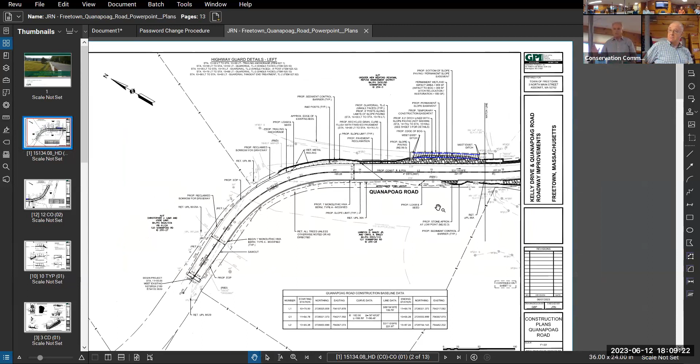So on pretty much the easterly side, that'll all be country drainage, still flowing off the road. On the bog side, what we'll be doing is putting in what's called slope paving - don't let that confuse you, because it's not paving. It's a MassDOT thing where it's just stones, about 2 or 3 cubic feet in diameter, larger stones. For some odd reason they call it slope paving, but we'll be doing that on the side towards the cranberry bog.

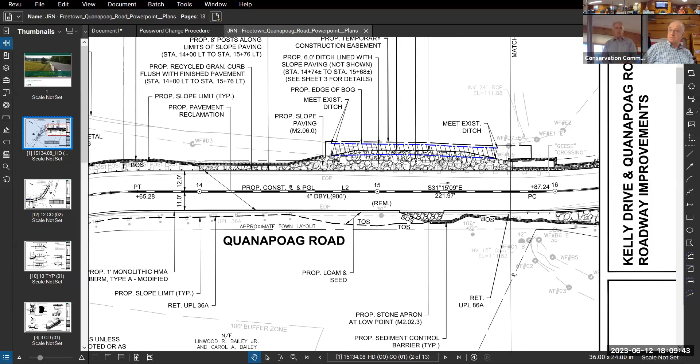And in blue, you can see where we'll be relocating the ditch. We're pushing it out a little bit into the bog side. The very last slide we'll show you is pretty much the extent of the work on the bog itself.

That bog is owned by the refuse district. My understanding is that they are appreciative of this effort by the town. I know Chuck's met with them - actually, we met with the bog operator last week, and he's basically happy, because the ditch itself, and we'll show you the picture, is pretty much filled in from all the sediments in the road.

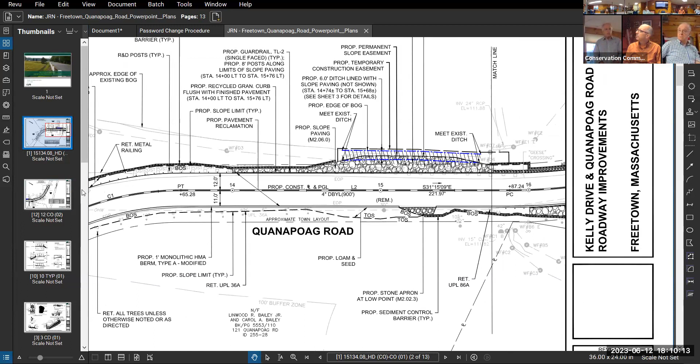That's just going a little bit further around the corner and showing you the extent there. And again, everything will remain country drainage on that side of the road.

Just want to go through - those are the cross sections at the bottom left corner. That would be on the north side, right before you as you're getting into the curve. It's just pavement reclamation. It's still banked on the inside as that water flows down there, it'll continue that flow.

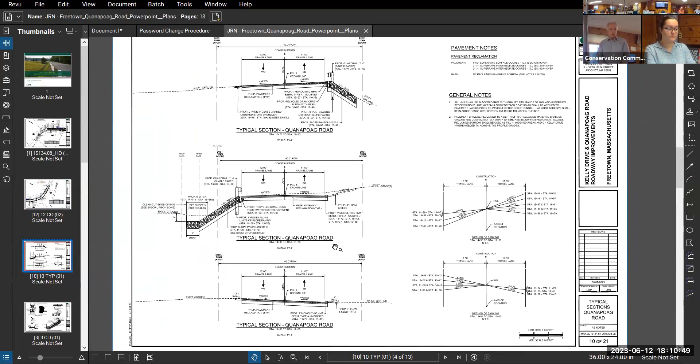As we get to the location where we need to do quite a bit of the slope stability, you can see the slope paving on that side with the new ditch in there. So the bottom of the ditch will be 3 feet wide, and actually it'll fill up - when they fill it up, it'll be about 6 feet wide and then spills out over in the cranberry bog.

And again, there's a detail on the bottom right of what we'll be doing. So on the street side, it'll flow off the side of the road. We'll have a guardrail now - right now there's just concrete posts, and those are just hazardous, and actually they're leaning towards the bog. Everything's starting to fall in.

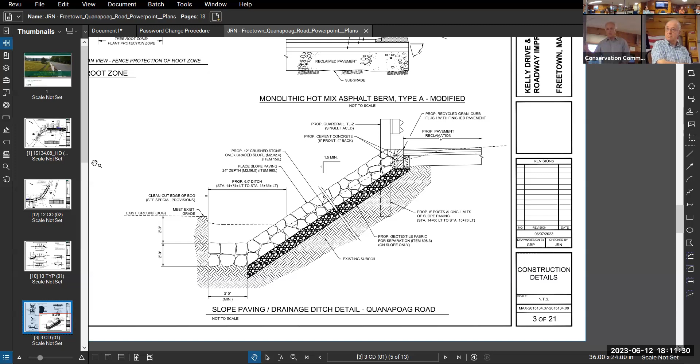So on that side, the flow will go off the road into the stones, and any sand and sediment will get trapped within the stones and won't make it to the bottom of the ditch. We carry that stone all the way into the bottom of the ditch. We need about 2 feet of stone anyways to act like a foot for the slope, so we just figured we'll do the whole 3 feet.

And like I said, we met with the bog operator last week and discussed what we were doing, and he was thanking us because he said he'd have to rent a helicopter for $1,000 an hour to clean out that ditch, which is astronomical. So he was on board with that.

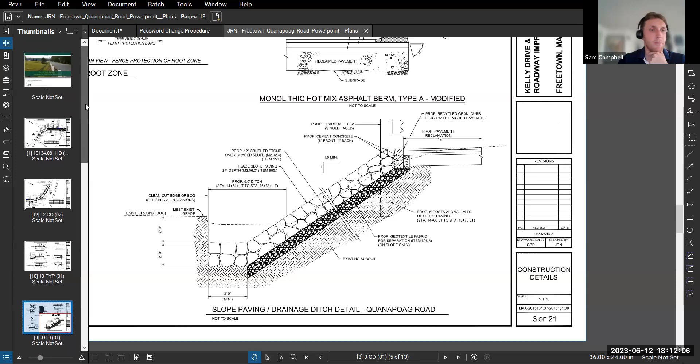Sam, if you want to go through the environmental impact briefly. Actually, Jim, I might just show the other photos first too - I think those might be helpful.

So that's the ditch channel. You can see there it's become pretty shallow over the years, just through that sedimentation accumulating in there, and you're seeing the beginnings of some sort of vegetation establishing in it.

I think, Jim, you said that when you talked to the operator, typically this should be dry, but because of the sedimentation, it's damming up stormwater for longer than usual. Yeah, it's not draining. He said it's dry most of the spring and summer months until they flood the bogs.

That ditch is dry. So just to reiterate, adjacent to this guard post we've got significant erosion down the slope and adjacent to the edge of roadway here and here. And here's another view of the channel, as you can see it's been filled in pretty significantly. You can see some of the issues on the slope as well.

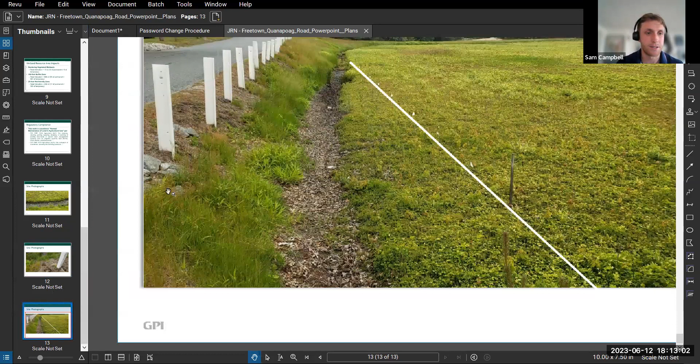This line of white flags was laid out to indicate where the back of the reconstituted ditch is going to end up. That'll be where they'll actually cut the bog, and then the new ditch will be to the left of that line. That makes sense.

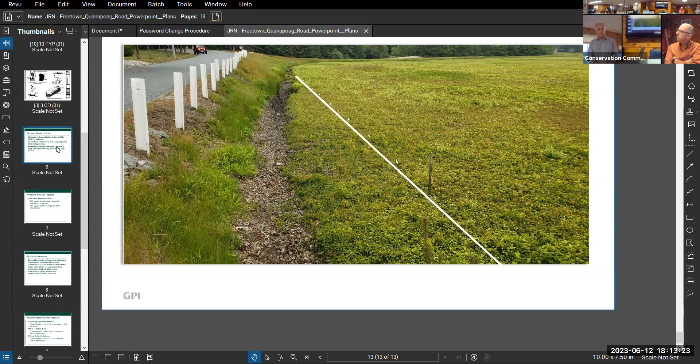Great. As I'm sure you saw in the RDA that we submitted, we had the wetlands out here delineated by ECR consultants in December 2022. They picked up an intermittent stream on the west side of Quanapoag Road, but we're not going to be impacting that at all, that's outside of our limit of work. And then there are bordering vegetated wetlands associated with the cranberry bog itself. So those are depicted on the plans that you saw earlier.

Our total area of alteration is 859 square feet of BVW, all associated with the work in the bog. 550 square feet of that is just the result of excavating the ditch and reestablishing that channel. The other 309 square feet is as a result of that slope paving and the installation of the toe of the slope that Jim was talking about.

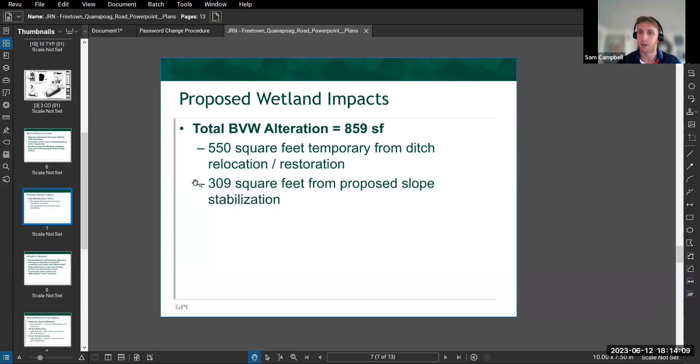As far as mitigation measures, this is going to reestablish a defined bank for that ditch and improve the hydraulic connection both within the bog and to the intermittent stream down gradient of this. So you're not going to get that nasty standing water in the bog - it's going to be dry for the majority of the spring and summer like it's supposed to be.

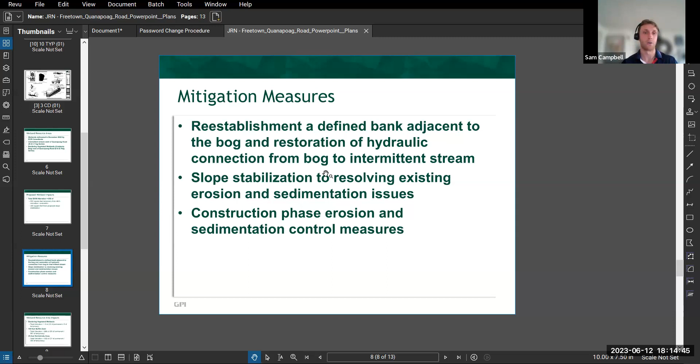We'll resolve the existing slope issues - so you're resolving that erosion, stabilizing the slope and preventing this from happening in the future. And then we're going to install construction phase erosion and sedimentation control measures to ensure that all of our down gradient wetlands are protected during construction.

Regulatory compliance - this work is considered normal maintenance of agricultural land per 310 CMR 10.04, which allows for the cleaning, clearing, grading, repairing, dredging, or restoration of existing man-made or natural water management systems, such as irrigation systems, field ditches, and cross ditches, and 310 CMR 10.04 B13, which is the cultivation of cranberries, including the following practices, which refers back to the previous section about maintaining your drainage ditches.

So this is normal agricultural maintenance that'll improve the conditions on the site, and I think is being seen as a huge plus for the operator of the bog. With that, I think we'll turn it over to the commission for any questions.

Just Chuck's here, so this needs to get done ASAP, right? You weren't here, but they were talking about losing the road, right? Last winter with the frost it was basically heaving that road towards the cranberry bog. Yeah, it's no good. Road shouldn't move.

Again, as we spoke, Chuck's been kind enough to go over what's going to be done, how they're going to go about doing it, which is why I knew a little bit more about this project. So I do appreciate you taking the time to come in, give us the presentation, let the folks out there know what's going on. Does anybody have any questions from the board?

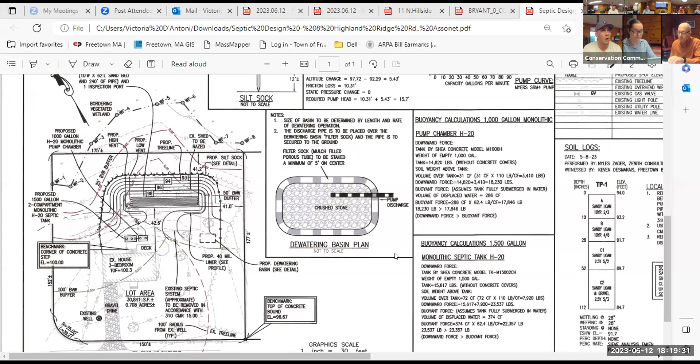As you can see, it's a fairly small lot, only about 30,000 square feet. There's a wetland to the north side of the property, the rear of the property, which you can see flagged as wetland 1 through wetland flag 8. A portion of it does fall off the property in the rear there.

Basically what's forcing us within the 100 foot buffer zone is the fact that the well is in the front of the property, so it forces us in order to meet Title V requirement of 100 feet from that well to put the system in the back of the property. That is currently where the existing system is as well. The soils were luckily fairly decent, but the water table is very high, which you would suspect.

So the proposal is there's gonna have to be some vegetation removed, but the proposal is to put in some silt sock, clear the trees, remove the existing septic system, and put in a new 1,500 gallon, 2-compartment H20 monolithic septic tank, a 1,000 gallon H20 monolithic pump chamber, and a Presby system.

As you can see, the grade from the back of the house down to the wetland is fairly significant, about a 5 or 6 foot elevation change. In order to be able to build this system, we have to build that area up, which you can kind of see by the contouring around the septic system, in order to meet the groundwater separation required by Title V.

Luckily we were able to stay over 50 feet from the wetland with the septic system itself, and we're staying outside the 25-foot buffer with all work. We're going to be adding erosion control, and I also provided a dewatering basin, which will probably be necessary during construction since it's a fairly wet time and a wet site.

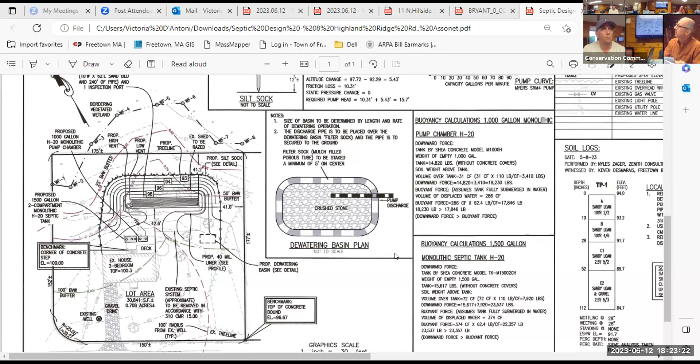This isn't Presby, is it? It is a Presby. That Presby allows for a 40% reduction in footprint, so you're making it smaller too. Yeah, essentially, if it's a 1,000 square foot typical conventional system, this would be a 600 square foot.

That's not the case here, but in general, that's the benefit of the Presby system — it allows for that significant decrease in footprint. And you no longer need the 5-foot overdig either, that's also eliminated. So it allows you to keep a smaller footprint overall.

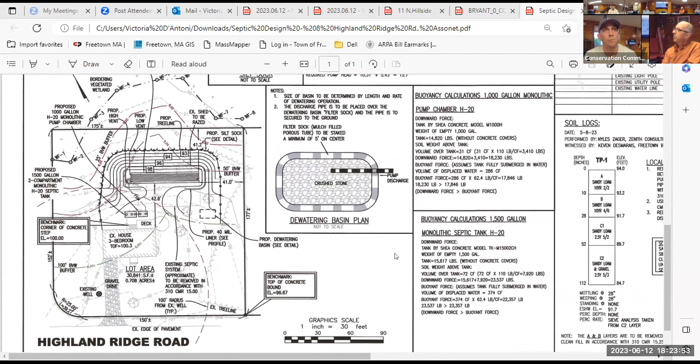If I'm not mistaken, then we're all set. Excellent, I'll entertain a motion that we issue a negative determination number 3.

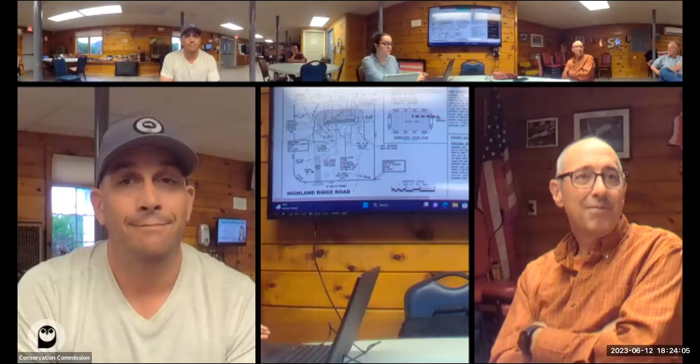I need that motion. I apologize, I know I usually drone on, but you've all heard me say it a thousand times — negative determination number 3. Motion made, thank you. I'll second. Motion made and supported, any further discussion on the motion?

Hearing none, all those in favor signify by saying aye. Roll call vote: Charlie Sullivan, aye. Margaret French, aye. Keven Desmarais, aye. Motion passes unanimously.

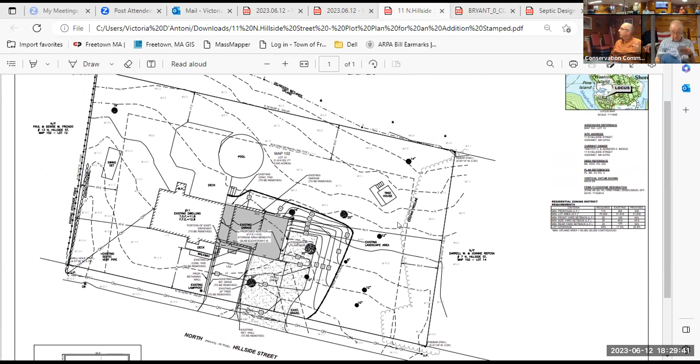So you're gonna have your footings, I'm thinking now about spoils, how much material are we gonna be bringing out, where are we gonna keep it? Is it gonna be able to be taken off site that day? Typically, when we're permitting work within a flood zone, granted this isn't a velocity zone, but still.

And I get it, you don't need to provide compensatory storage, but because it is a flood zone, during construction we're gonna be concerned about your construction materials, and more specifically about any kind of stockpiling of material. So any stockpiling of material brought on site needs to be protected within that area of siltation control, all right? That's gonna be a typical condition when we're working within the flood zone.

Sure, we're not gonna haul any material off site. I think the material, we're taking about 3 feet of material out from under the addition, and we're gonna place it immediately to the side of it. It can be done all at once. If you can become a neutral site, that's the best for everybody. Right, you don't have to haul it in, you're not paying to haul it out, that'll be good, so.

All right, other than that, whatever stockpile material, whatever it is, needs to be done and kept protected within that siltation control area, so I don't have anything else. Doesn't sound like the rest of the board has anything else, so. That being said, I'll entertain a motion that we approve the plans as submitted with the condition that siltation control be provided for all spoils, piles, any materials that will be delivered to the site and held on site for more than 24 hours.

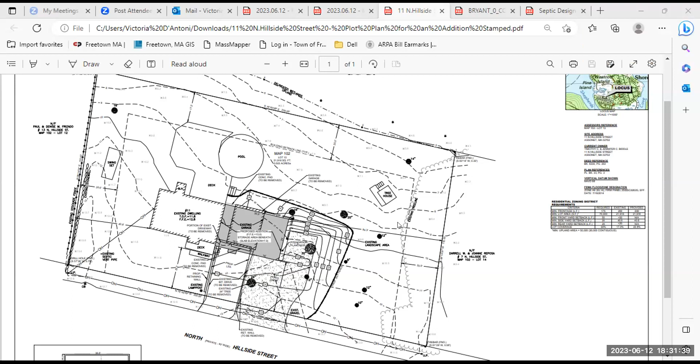Roll call vote. Charlie Sullivan? Aye. Charlie says aye. Margaret French? Aye. Margaret says aye. Kevin Demara says aye. Motion passes unanimously.

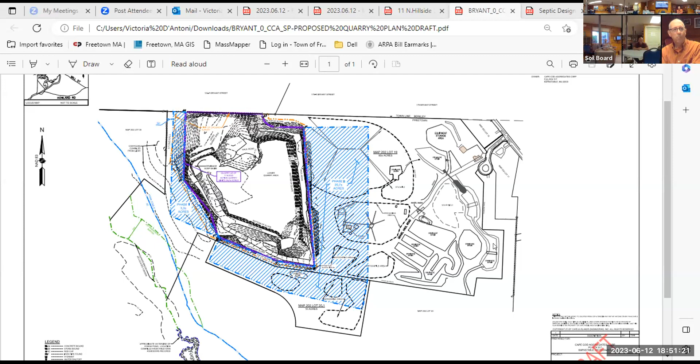We've been engaged in some big local projects like the railroads. We work with both Skanska, DW White, and with Middlesex on sort of both ends of that project. We've worked on cranberry bogs and schools and residential projects. We supply ready mix plants and local precast companies, as well as a lot of local contractors.

So that part of our business isn't going to change, and we really are focused on supplying our very loyal customer base. Everybody right now is concerned about stone - there's a real shortage of it. If you can make some 3/4 to 1.5 double wash, that'd be great. It's just very hard right now to meet demand.

Our strategy is not to go out and try to be the supplier for everybody. Our strategy is that we have this great customer base that we've had for a long time, and we're trying to supply those guys and keep them going, for a long time. We've got a good spot here, and we work very hard to manage it and mitigate it the best we can.

We're just looking to take another step forward in good land management and business management. I went out of my way at first to point out that these are smaller issues that will always get attention - a simple phone call to you or the plant, and they get the attention. Over 16 years, I don't know that you can count them on one hand. I want to be clear to everybody - I wanted to give a bit of praise to CCA simply because while most businesses try to do and want to do the right thing, we can run into businesses, whether here in Freetown or anywhere, where it's difficult. From a regulatory side, we certainly appreciate when a business at least is willing to work with us, sit down at the table, understand our concerns and be appreciative of that relationship. So I won't keep beating that dead horse, but I thought it was important to note that with CCA.

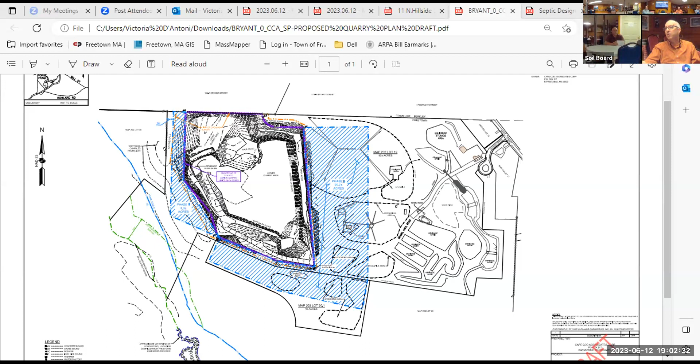It can escalate to the point where I think Mass General Law would allow us, Steve, to fine up to $10,000 a day. So we are listening to town counsel. I will be, because it's a privileged conversation, I will go only so far. But this is the means and methods by which counsel has been successful with these things in getting compliance. So if you're asking what could we eventually do, daily fines of up to, I believe he said $10,000, and take them to Superior Court. I believe Superior Court, yep. So that's what we can do.

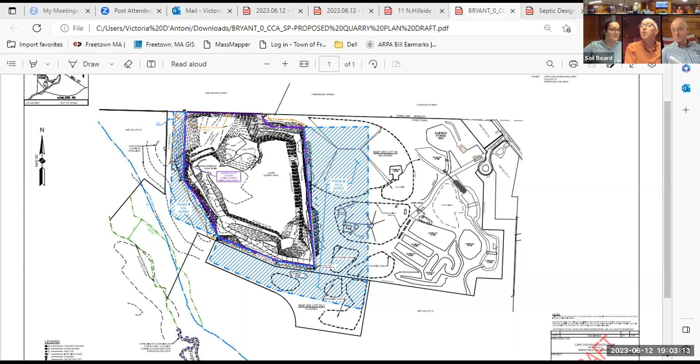So we're doing it. There you go. Things take time. You'll learn, if you haven't already, in your role on the planning board, that things oftentimes just take time. Yeah, it seems like a long time. Does, yep. And then if you think this is long, wait till it gets to court. And then one little thing, and the judge says, well, we're gonna give him another 90 days, and you just get used to it. You just have to keep plugging along because you know you're doing the right thing.

All right, can I get a motion on the minutes? Can you put that up so I can read the minutes again, please? I forget the dates now. So I have minutes from 11/19/2019, 10/26/2020, 12/20/21, and 12/05/2022. We need to do those minutes now, because we've had the third meeting, so we need to do those minutes now.

So I'll entertain a motion that we approve the minutes as submitted. I'll make that. I need a second, Margaret. Second, motion made, supported. Any discussion on the motion? Hearing none, all in favor signify by saying aye. Roll call vote: Charlie Sullivan, aye. Margaret French, aye. Kevin Demara, aye. Motion passes unanimously. Any other business to properly come before the soil board?

I can't think of anything. I don't have anything else. Charlie, you good, right? We're good on soil. Margaret, all right. That being said, I'll entertain everybody's favorite motion.